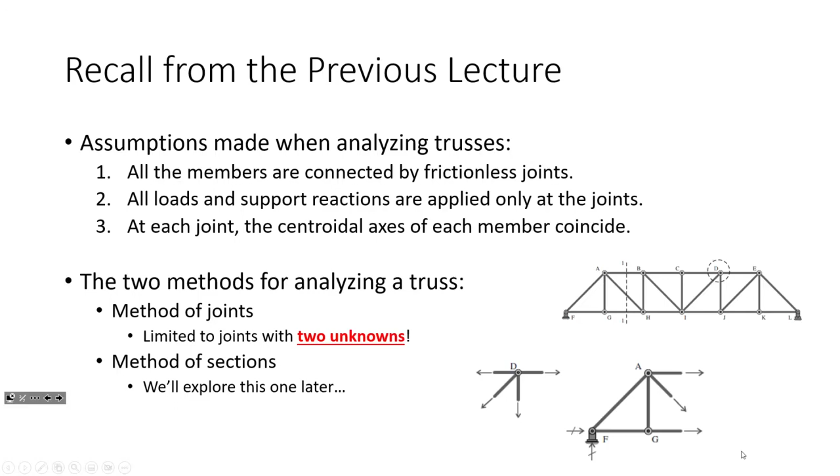We're going to do method of sections later, but I want to take a little bit of a tangent and talk about internal indeterminacy. So if you recall, we express indeterminacy through a quantity that we termed I. The last time we dealt with indeterminacy, we called it I sub E, because that was the external indeterminacy of a structure, and what we were doing was comparing the knowns versus the unknowns in a truss analysis. And we found certain patterns with I.

So for instance, if I was negative, the structure was unstable. If I was 0, the structure was probably determinate. And if we found that I was positive, it was probably indeterminate. When I say probably, the probably is about the aspect of stability. So if I is 0, it is probably stable and statically determinate. If I is 2, it is probably stable and statically indeterminate to the 2nd degree. So let's talk about what that means.

So again, here's our degree of external indeterminacy. And the way that we computed that is we took the number of knowns and the number of unknowns and compared them. And so this formula here, I equals R minus EC plus 3, this is essentially the unknown quantities minus the known quantities.

So the known quantities are 3 plus EC, and why 3? Because at a structural level, we have 3 equations of equilibrium that we know: sum of forces in the x direction is 0, sum of forces in the y direction is 0, and sum of moments.

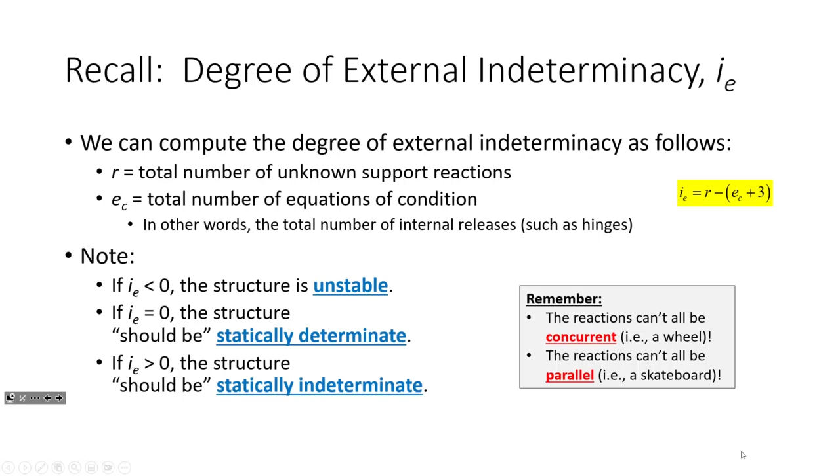Spoiler alert, we will. Now the number of unknowns is the number of support reactions. So we said that if IE is negative, the structure is unstable, just period. If it's 0, it should be statically determinate, and if it's positive, it should be statically indeterminate. And by the should be's, remember, the reactions can't all be concurrent, like a wheel type scenario, and the reactions can't all be parallel like a skateboard.

So, okay, let's talk about internal indeterminacy. We're going to apply the same logic, the same idea, but I want to look at it from a truss perspective as opposed to an overall structural perspective. So I want to look at this truss. Regardless of the loads, can I compute the support reactions on this truss?

I say yes, okay? And I say yes because if I, let's see—I hope my pen will work here. I think it will. I have a reaction here, a reaction here, and a reaction here. So 3 equations, 3 unknowns. If I'm just looking at the support reactions, can I compute the support reactions on that truss? You bet. There's no reason I can't compute those support reactions.

But now let's start looking at it from a method of joints perspective. When I do a method of joints analysis, I have to start with the joint that has how many members? 2, right? Because I only have 2 equations of equilibrium per joint. So how many unknowns does this joint have? 3. This one has 5, 5, 5, 5, 5, 5, 3, 3.

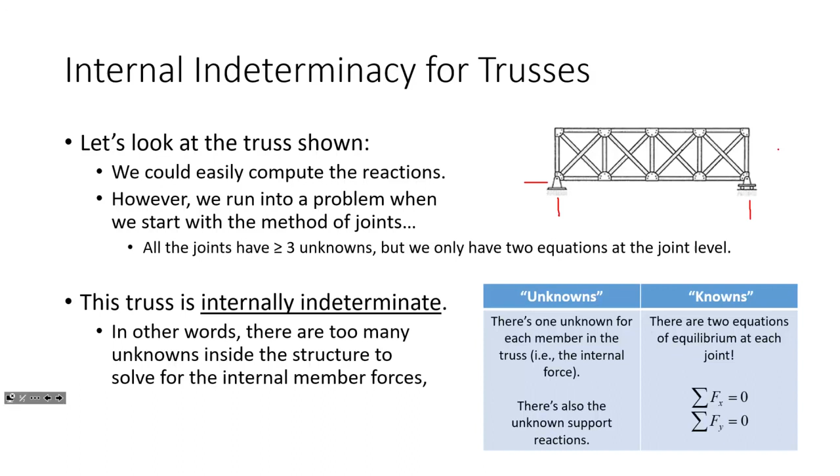The unknowns, well, what are the unknowns? There is 1 unknown for every member, right? What's the unknown force inside this member, this member, this member, this member, this member? So there's an unknown quantity for every member. There's also the unknown support reactions. So I can take the number of unknowns and the number of knowns and develop this.

This is the degree of internal indeterminacy in trusses: M plus R minus 2J. It's in the same fashion as the previous expression, the unknowns minus the knowns. So what are the unknowns? The unknowns are M plus R. M is the total number of members. R is the total number of unknown support reactions.

And I use that in this expression because on the joints, we do have reactions applied to the joints as forces, so they do qualify in this expression as well. And as for the number of known quantities, I have 2 known quantities per joint. So M plus R minus 2J, that's the I sub T term I mentioned earlier, the degree of internal indeterminacy. Now, if IT is less than 0, the truss is internally unstable. Okay?

This, I believe, is an example of a structure that is internally unstable. Look at this structure right here. M plus R, I have 3 reactions, 4 members: 1, 2, 3, 4. M plus R is 7. 4 joints: 1, 2, 3, 4. 2 times 4 is 8. So I sub t for this structure is -1.

That structure is internally unstable. It's internally unstable because you could apply a lateral load and the structure would just collapse. But it's also internally unstable because the I sub t term is negative. So if I sub t is negative, the structure is internally unstable. If I sub t equals 0, the truss should be internally stable and statically determinate. If it's greater than 0, the truss should be internally statically indeterminate.

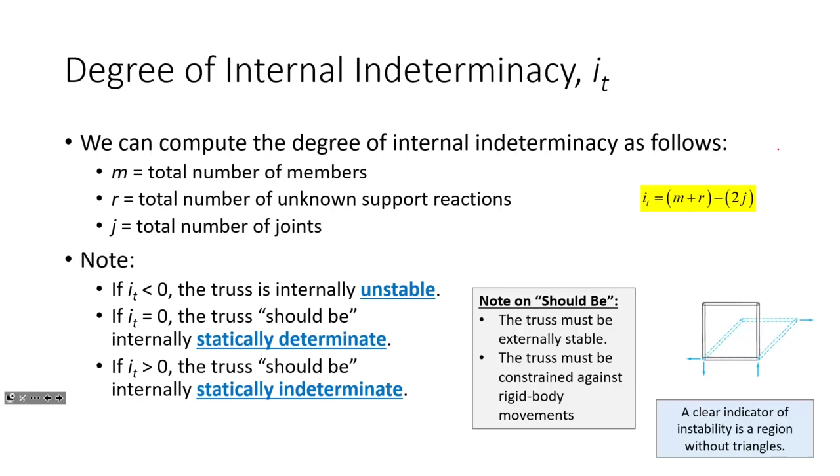So the truss is stable and statically determinate, both externally and internally. This is the type of truss we're going to be dealing with. On your truss analysis project later in the semester, one of the requirements for the truss you lay out is it must have an IE and an IT value of 0, so it will be externally and internally stable and statically determinate.

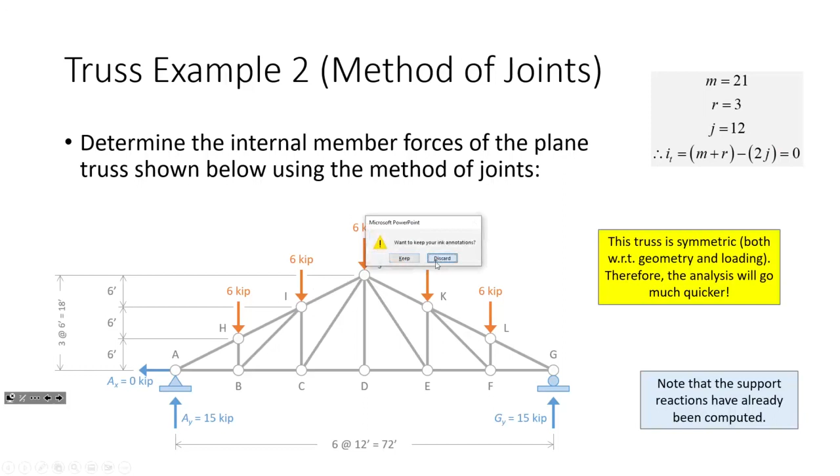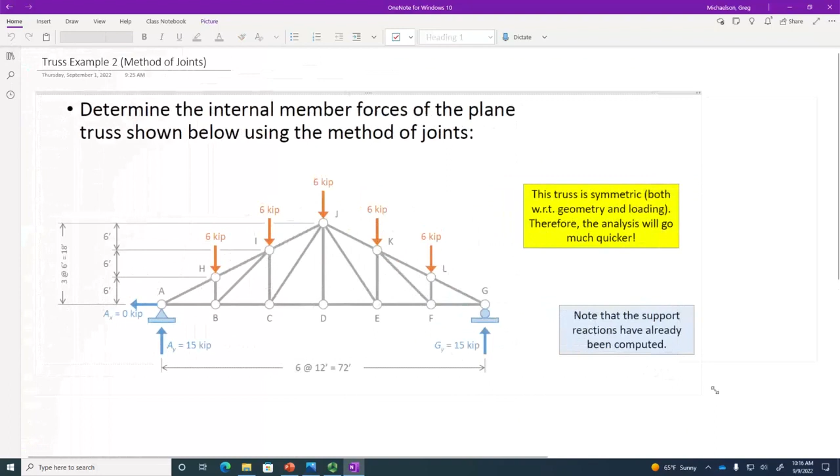Okay, all right, so here's my structure. Notice that I've given you the support reactions, and I think they're much easier to see this time because I've got 6, 12, 30 kips going down, so I got to have 15 kips going up, so it's 15 kips at each support. I think that part's pretty easy.

Like last time, and we sort of figured this out afterwards, I kind of want to do this now. What I want to do now is develop our game plan, in other words, the order in which we're going to solve this truss. So let's do that. Which joint do you want to solve first?

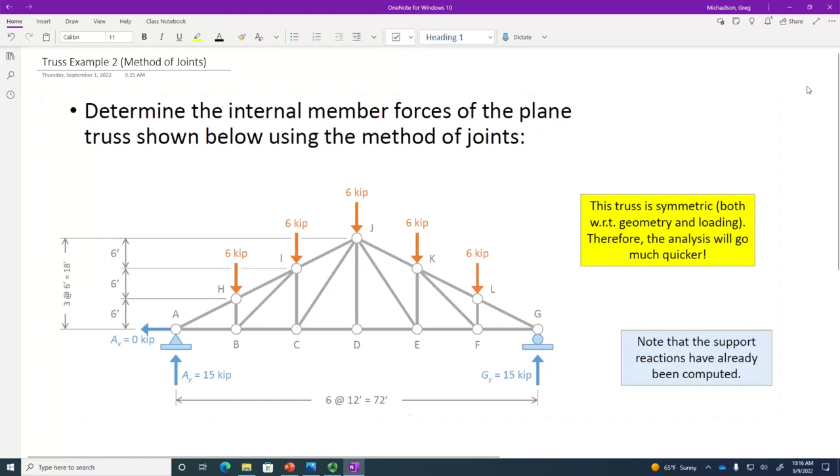We'll call this order of solution. Which joint do you want to solve first? Everybody's quiet. Well, can I solve joint I first? Why? There's too many unknowns. So it seems like I'm going to start where? A, right? So I'm going to solve joint A first, and joint A is going to give me this member and this member.

So what's the next joint I'm going to solve after that? H. H is going to give me this member and that member. Okay, so now what? B. Okay, and B is going to give me that member and that member.

Then what? I. That's going to give me that member and that member. So what's left? C. C. And now hold on, got C. And then I'm going to have one member left in the middle. I could solve joint J and get that member, but I'm lazy, so I'm going to solve joint D and get that member. Now why am I saying there's only one member left for joint D?

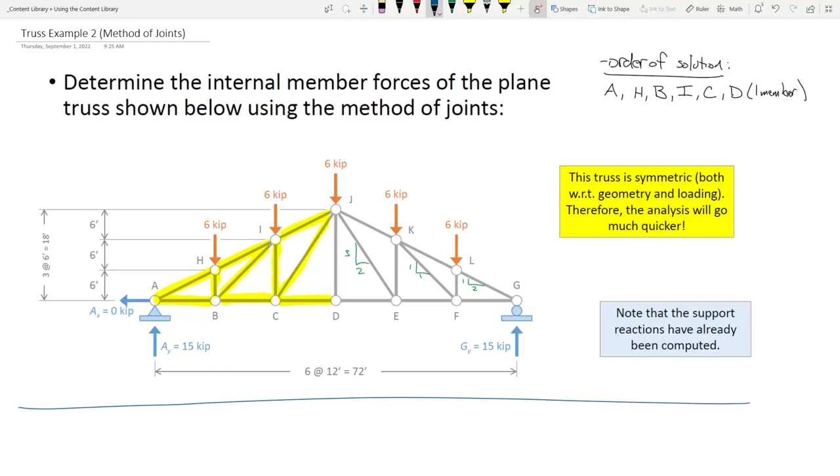So what this means is that we really need to be cognizant of what order we solve these in. Okay, I'm going to write this order: A, H, B, I, C. I'm going to write that order just so I have it.

All right, so we agreed we're going to do joint A first. Here, let me scroll up a little bit so we still have the joint in view. Okay. So we've got the joint, we have a member, bless you, a member, we have a load up of 15 kips. Then we have this, which we'll call AB.

And then this is 1 to 2, right? So we got to be very cognizant of incorporating the correct slope ratio on the correct member on this truss. Okay, so you tell me what to do. I'm lazy, I want you all to tell me what to do for a change.

Sum forces in the Y. There we go. What does that tell me? I'll give you AHY, the Y component of AH. Okay, and what is it? 15 kips going down. Okay, so that means this goes down.

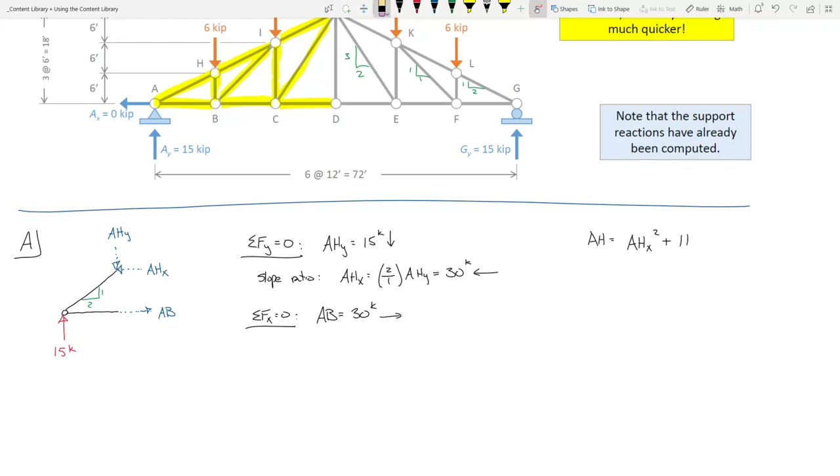This one I think is going to require a Casio FX 115 ES Plus or similar scientific calculator. I don't think this one's going to be as nice and pretty as a 345. The number of iPhone calculators is just...

I got 33.54. Say again? 33.54. Do I have a second on that? Yes. Okay, so therefore, AB is experiencing 30 kips in tension or compression? No, AB, tension. AH is 33.54 kips in tension or compression. That one's in compression.

Isn't it so much better when you have your game plan figured out before you start even doing the problem. Like you know what order of joints you're going to do, what order you're going to solve the problem in. Here, I'll leave the A up and I'll say, okay, we've done that one.

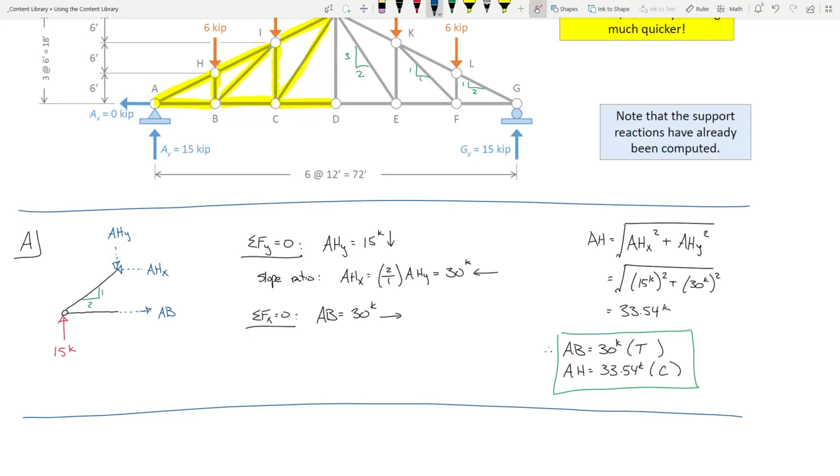So next comes joint H, okay? Because again, we've got this member and this member solved, so that's joint H. Okay, so how many members do I have framing into joint H? I've got 4. So here's H. Okay, let's see. No, 3. I'm sorry, 3. Okay, so I have 6 kips.

All right, I've got a known quantity here and a known quantity here. Because this is AHX, and that's 30 kips, and that's AHY, and that's 15 kips. AHX, do I draw this arrow to the left or to the right? Towards the joint, which is to the right. And this one is, again, towards the joint. AH is in compression, so it's in compression here too. So we apply this like that and like that.

So let's see, now we've got our unknowns like that and like that and like that. So I'll call this unknown member BH, and I'll call this HIX, HIY. Okay.

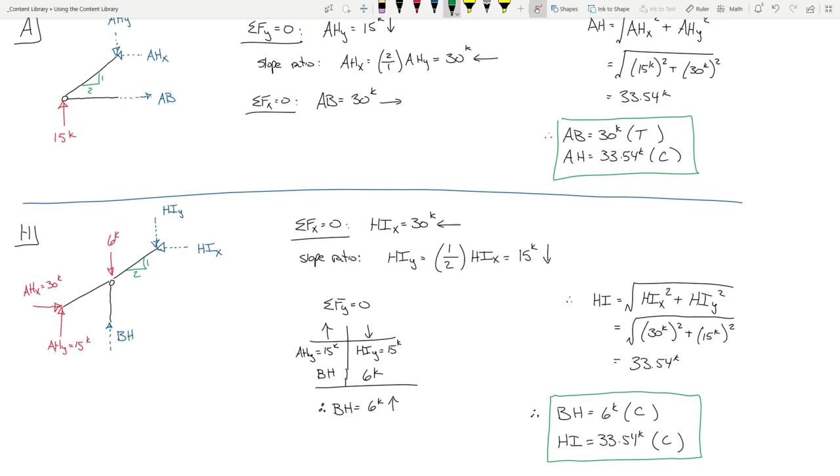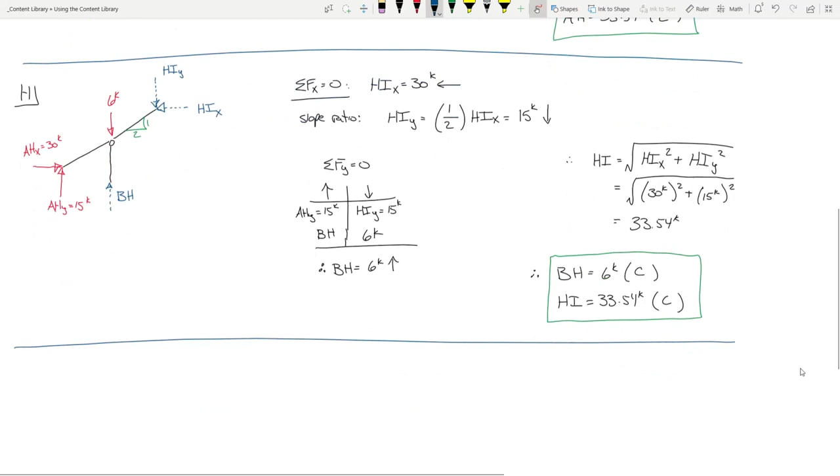All right, so now we're going to do joint B. Again, we're going to respect the strategy that we developed at the beginning of the problem. So we're going to do joint B next. Let's see what we got. And this truss is going to have something very interesting at the end - we're going to have an interesting result, you'll see what I mean. So let's draw out the joint. The joint looks like this.

Okay, what's the slope ratio on that diagonal? 1 to 1, so whatever the x component is, the y component is equal to that. Okay? Now we know this member, this is AB, and that is 30 kips.

What about that vertical member? What's the deal with that vertical member? How much is in this vertical member? 6. And going up or down? Down, because it's BH, right? And BH was in compression.

I'll be honest, I think the hardest part about the method of joints is the bookkeeping. I think that's really honestly the hardest part, is just making sure that you keep track of which direction things are going. I have seen students that what they will do is they will do these blown up joint analyses where they put like this joint here, and then they put this joint here. And so if they get like an arrow that goes like this, then they put this arrow that goes like that. They just do the whole truss on this big, huge sheet of paper. And there's actually some logic to it because you can go through it pretty quickly. It just takes a lot more drawing.

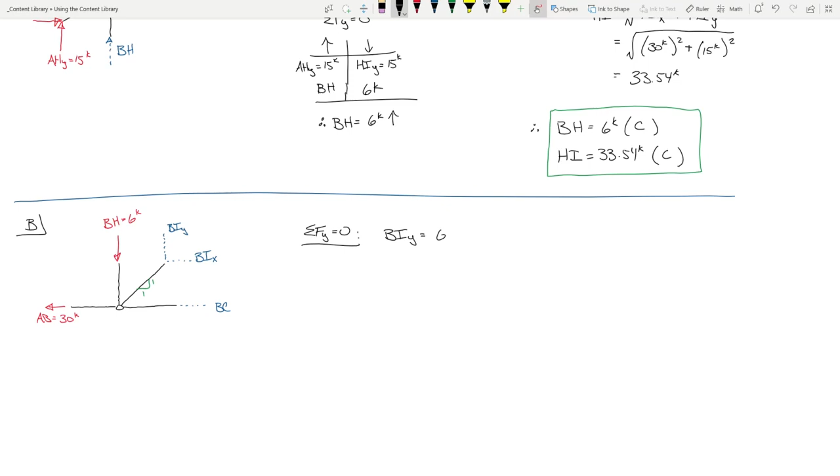Okay, all right, so I think what I ought to do is some verticals first, and there's no loads applied to this joint, so we can sum forces in the y direction. And so BIY is going to be what? 6 kips, and that's got to go up, right? So the slope ratio tells us that because that's 1 to 1, BIX is BIY, which is 6 kips going this way.

Now, if I sum forces in the x direction, what am I going to get for BC? 24 kips. Going to the right, because I've got 30 kips going to the left, 6 going to the right, I need another 24 going to the right. Okay, so the last thing to do,

use my Pythagorean theorem. And then that is, that's 6 times the square root of 2. I don't think I can do that one in my head. 8.48, 8.48, do I have a second? Yeah, and then, oh, I need to put my arrow on that. So therefore, BC is 24 kips in tension. And now they're both in tension.

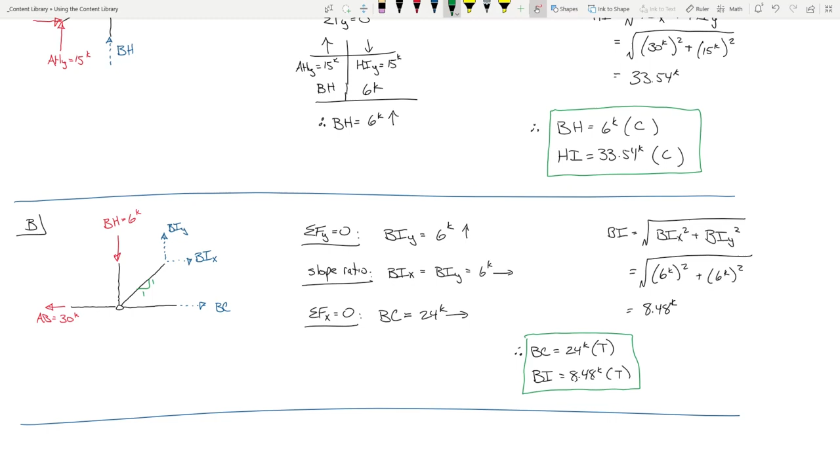If you look at the truss in general, somebody help me out with the note keeping. AH, was that tension or compression? HI, was that tension or compression? AB, was that compression or tension? What about this one, BC? Tension. So it's funny, all the members of the truss that are on the top are in compression, and all the ones on the bottom are in tension. It's almost like there's something to that.

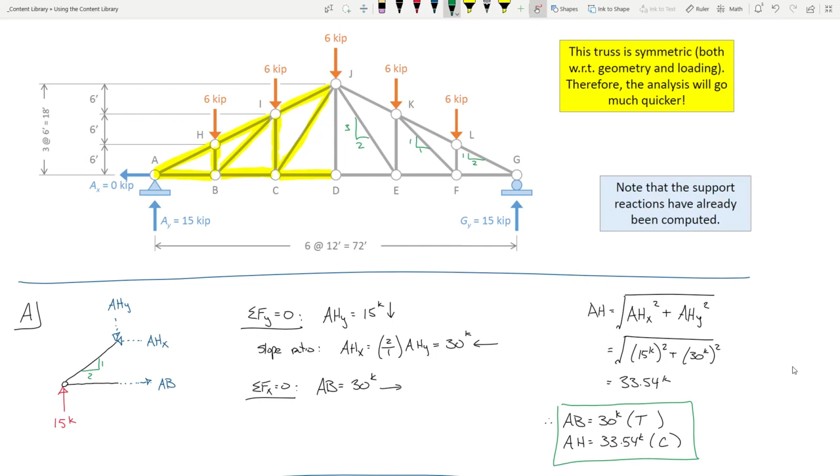If I was a betting man, I bet you IJ is in compression. The reason is because I have a truss that's simply supported and all the loads are on the top applying downwards. So the way the truss is going to deform is sort of like this. The top is experiencing compression, the bottom is experiencing tension. The stuff in the middle will have a tendency to want to change signs depending upon the way the diagonals are going. So just food for thought. We'll be able to talk more about those patterns later when we look at things like influence lines. Just a random factoid for you.

Okay, so we're going to do I. I'm going to try and charge through I and C pretty quickly because I want to get to joint D. Joint D is kind of nifty. Joint I is kind of involved because it has diagonal members that go like this, but then we also have a diagonal member that goes like that, and a vertical member. And we've got a 6 kip load. There is just all sorts of hullabaloo going on at joint I.

So we just got to make sure we're cognizant of our bookkeeping. So we have member HI. I think HI was 15 and 30. So this is HIX, which was 30 kips, HIY, which is 15 kips. We also have this member here, which is in tension, and this is BI, so this is 6 and 6.

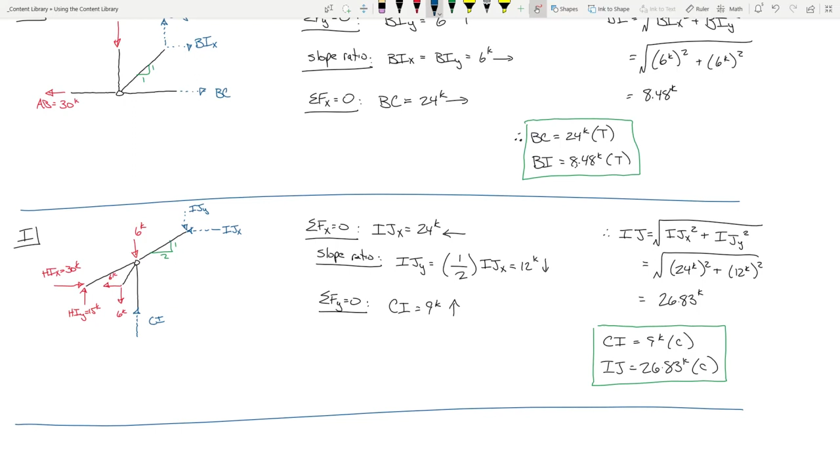Truss analysis isn't hard, it's just, it can be a little tedious. Okay, everybody good? All right, 2 more joints. And again, that last joint. Cool.

So we said we're doing joint C. So let's look at joint C. There's no loads applied to joint C. Goes like that, like that, and then there's a diagonal, and I think that diagonal was a 2 to 3. Was I right on that? Okay.

CI is 9 kips, again I'm drawing it downward. I had it upward here, but it's applied towards the joint because it's in compression. And then we know this member right here, that's BC. What was BC? 24, and it was in tension, right?

So yeah, oh by the way, didn't I say IJ would be in compression? By the way, y'all, shoot, look at that. It's not like I had the problem done in advance or anything. Again, I'm a dork, I know.

So, sum forces in the Y, slope ratio, some forces in the X. So we'll call this CJY.

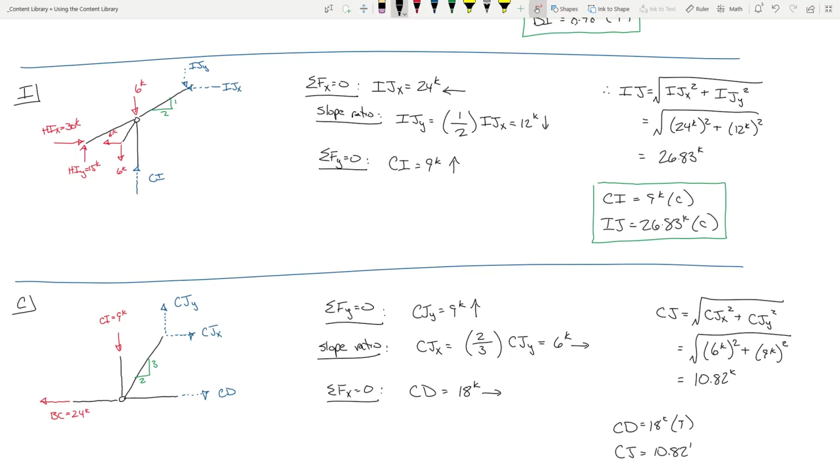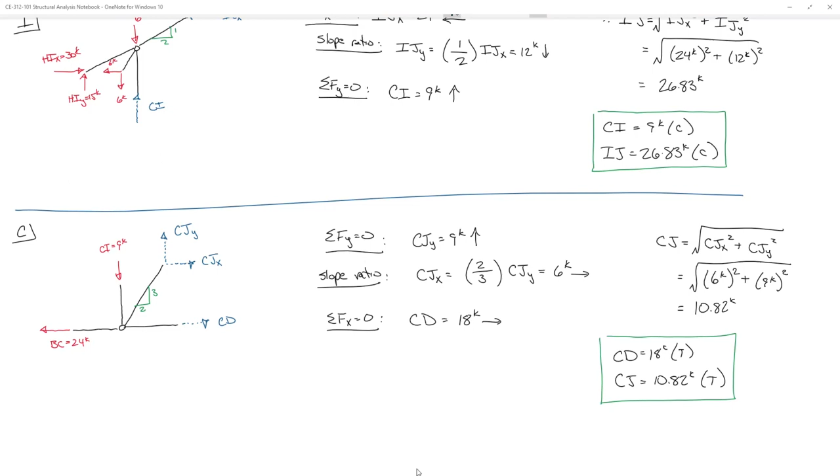Okay, I think we're on our last joint. I think you're the only person that had that reaction. Get it? Reaction. Just, again, I'm a dad. Be ready for the dad jokes, they're going to be coming. Can't help it, baked in.

Okay, joint D. Something interesting is going to happen at this joint. So here's the joint. Now, the only member that we know is this member right here, CD. We don't know this member, which we're going to call DJ. And we don't know this member right here, which we're going to call DE.

Now, sum of forces in the x direction tells me that DE is 18 kips this way. But we kind of already knew that because symmetry told us that was going to be the case. And you can continue the rest of the truss analysis and you'll find the answers start mirroring one another, like this diagonal matches this diagonal and this one matches this one, etc.

But this DJ, this one's weird, okay? Because I have the sum of the forces in the y direction. What is DJ? Zero, it's 0. Huh, it's 0. It's not tension or compression, it's nothing. DJ is a 0 force member. The answer is 0.

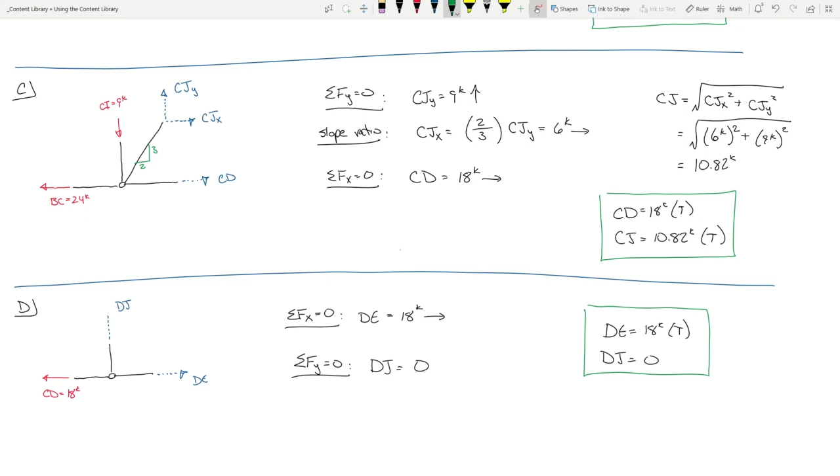Now, what clickbait for the YouTube video. No, so I'll give you a short answer, a short answer that can relate to the math. Tell me, didn't mean to close that, but I can open that back up.

What would happen to this if that member wasn't there? It would be unstable. So if we removed that member, the structure would be unstable, we would create a collapse mechanism in the structure. So that is one reason.

But if I'm being honest, that's kind of a cheap reason because we could configure the truss such that there were no 0 force members, right? But I'll give you 2 quick answers and we'll talk about it in more detail. Number 1, we might need members there to serve as bracing elements. That's more of a steel design topic, we'll talk about that tomorrow. But 2, what if the loads move? So it's a 0 load right now in a perfect scenario. Yes, but we'll get to that a little bit more later.

But the clickbait is, without doing any truss analysis, I could have told you that member DJ was 0 by just looking at the truss. And so what we're going to talk about next time is how do you look at a truss and identify the 0 force members. We're going to look at a truss that's really weird on Monday, and we're going to probably be able to identify just by looking at it that like half the members are 0 force members. And you'll find it's pretty slick. So that's all I've got.